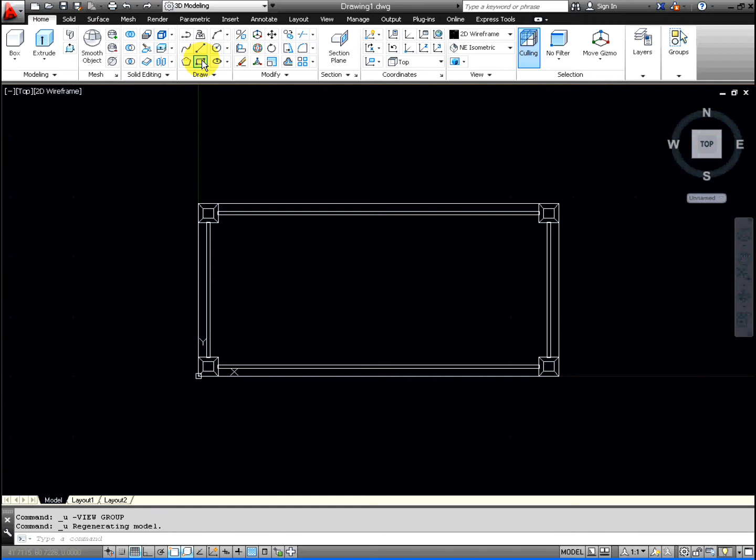For lesson 3, we're going to be putting a grommet through the top surface of the table. So let's make sure we're in the top view, and we're going to go to the ribbon and select the circle tool on the draw menu, and again go ahead and start at 0, 0 and press enter, and then type in 72, 4 for the X and the Y axis.

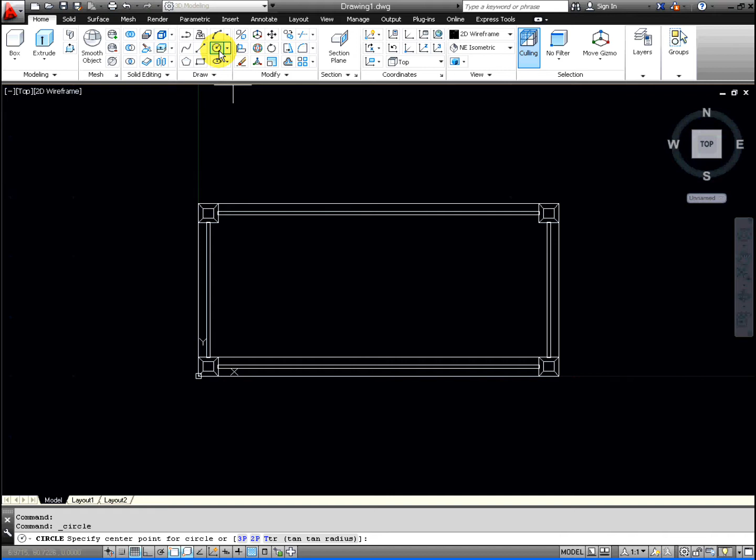And now grab the circle tool, and we want to make sure that we have selected the midpoint that is activated, and we're going to go ahead and select the center, and it wants us to know what the radius is, and we're going to type in 1.25, which is going to give us the diameter of 2.5 inches, which is a standard grommet diameter, or the radius of 1.25, and press enter.

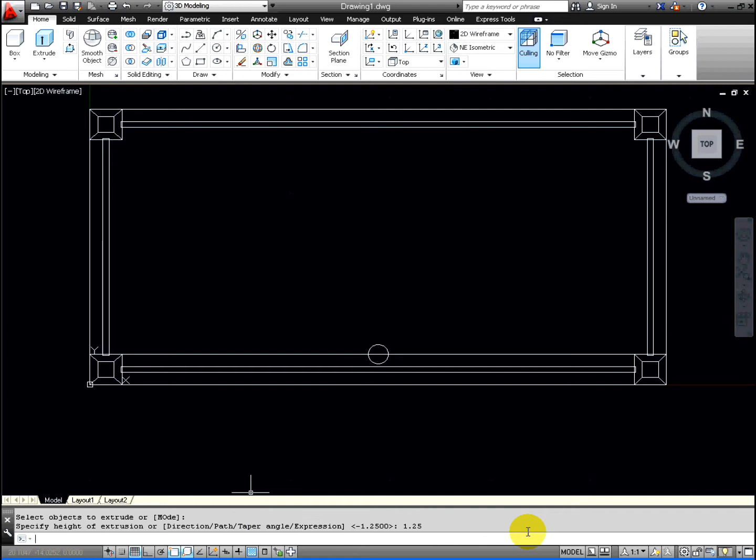And we want to extrude this. So type in extrude, or click the extrude icon, select the circle. Now we want to go through the surface. So it started at 0, 0. Type in 1.25. That'll go through the top of the surface. It's going to actually go up. And we need to inspect this. Before we get too carried away, let's make sure that the grommet hole that we've made, the cylinder, is going through the work surface. It will not work if it does not go through the surface, and in this case it is.

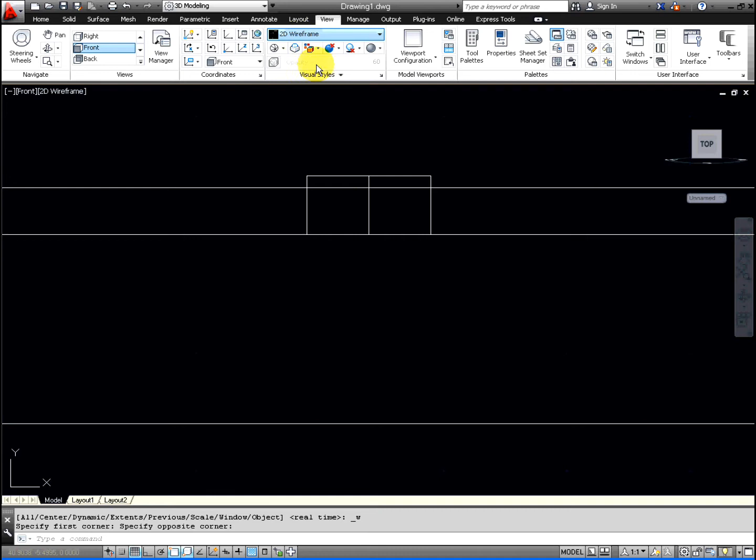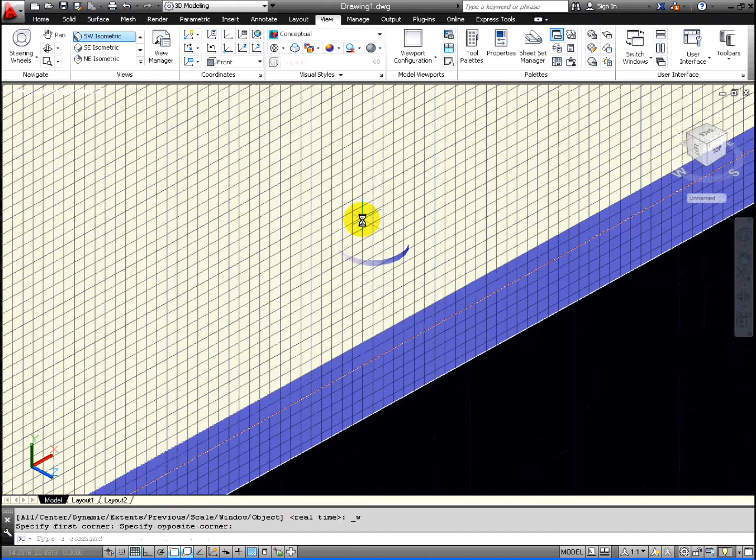So we started at 0, 0, and we made the grommet cylinder 1.25 inches going up on the z-axis. So once you inspect the table and you see that the grommet is actually going through, it's easiest to work in the 2D wireframe on this, but it has more impact when we do it in the conceptual mode. So here we go in the conceptual mode. We're going to find the subtract icon in the solid editing, or just go ahead and in the command line type in subtract,

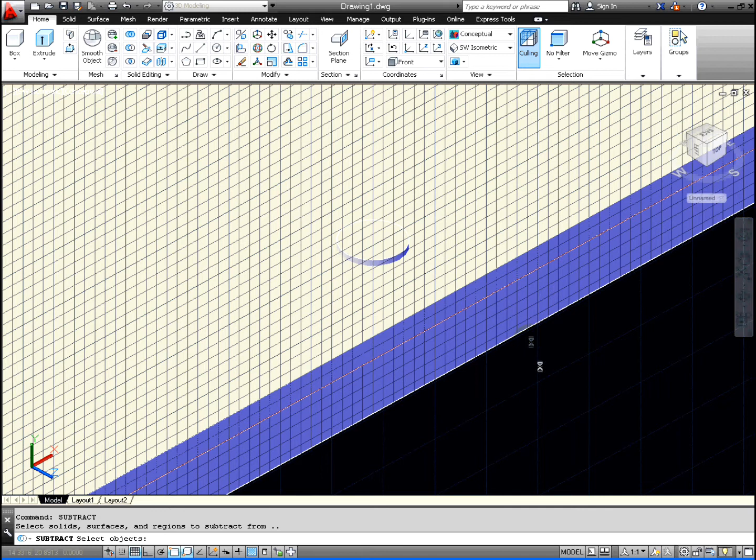and then press enter. Now it's critical that we select the tabletop surface first. That's what we want to keep. So first grab the tabletop, press enter, and then we'll go ahead and select the cylinder that we made, because that's what we're going to subtract, and then press enter. And you will see that the grommet has been formed, so that wire would go right through the top of the surface. And you see these quite often on computer tables and such.

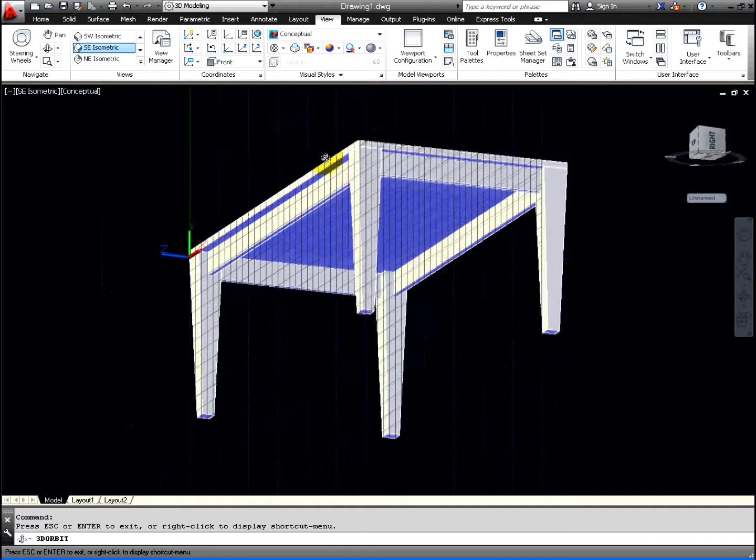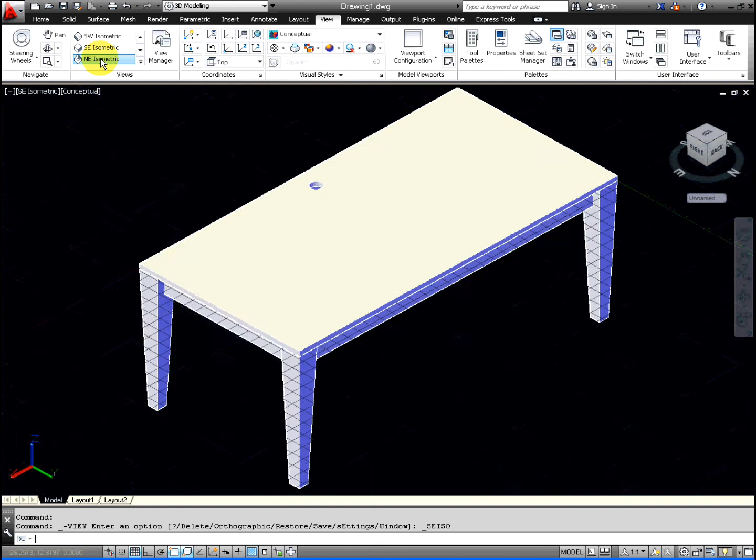Alright, so let's get to the top view. You should be able to see all the way through the table, and if you can't see all the way through, then you've probably not started at 0, 0, or you didn't type in the coordinate through the table, and it's only partial through there. And I would just suggest, instead of manipulating, just start all over again. It's not that difficult.

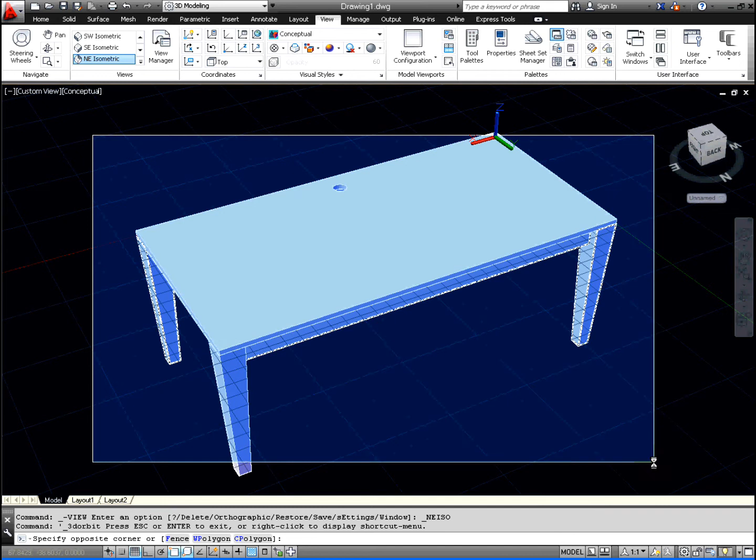Now what we want to do is go ahead and you can do this in the isometric view. If you right click, you can click onto the perspective view. It gives it more depth. It looks a little bit more realistic, but a gray table doesn't really look all that realistic. So let's go ahead in the properties, right click on the properties after we select the object.

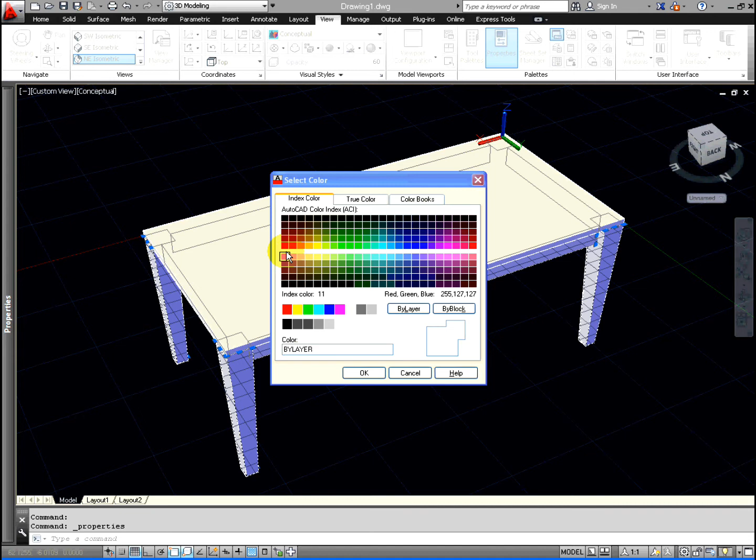You can use pretty much any color. I'm going to go ahead for a deeper wood color, so I'm going to do the index color of 32 or 34. In this case, we are going to select 22, which kind of looks like somewhat of a cherry. Make sure you get the surface also by selecting the item, right-clicking, and hitting the properties. Color 22.

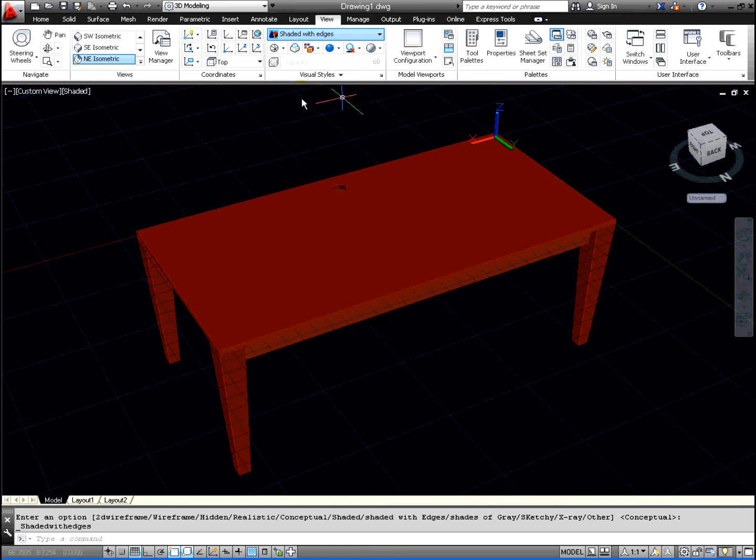Now the wood grain would come in a separate program. Typically we would use a 3ds Max or something of that nature, where we would actually apply wood texture to it. And you can change the color, you can see just by the shading, and inspect it before we move on, because we are essentially completed with this table. So inspect it, make sure the color looks good and you're happy with it.

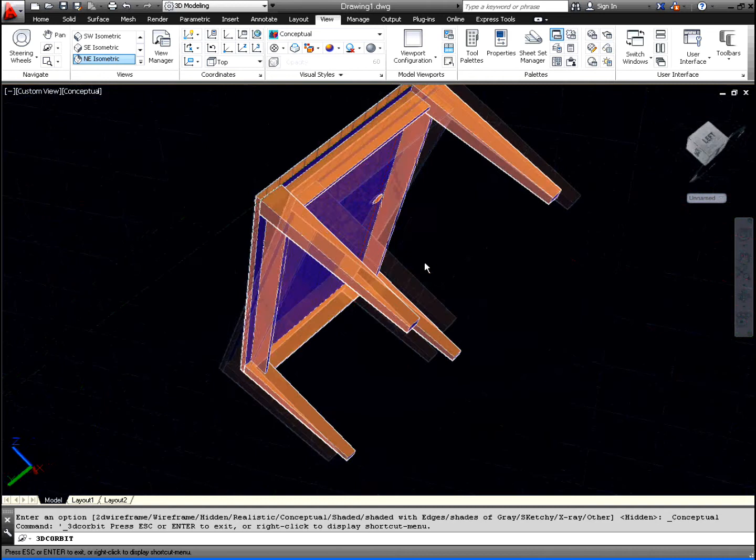And you can also do the continuous orbit, which is a nice little feature because you just click it and let it spin on its own, and you've completed the exercise. We put a grommet in and changed the color of the table, and we'll end on the top view.